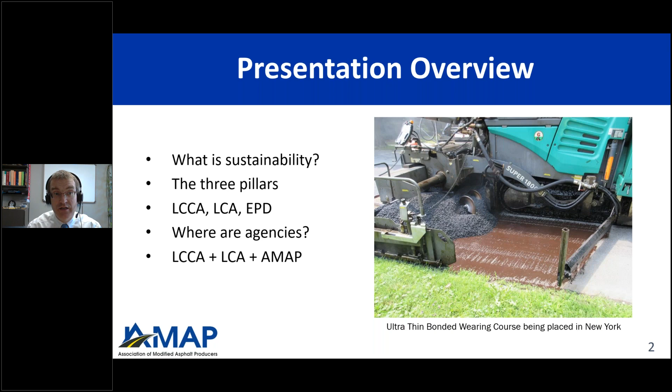So to start with, what is sustainability? I am fully cognizant that this has flirted with buzzword status. Resiliency has kind of replaced it, climate change has kind of replaced it, but I am familiar with that. That being said, I do think it's a very important term, worth thinking about and reflecting on whenever we move forward in our research and project areas.

When I think of sustainability, I really think of it having its roots in the United Nations. There are several documents, all available online free of charge, that started talking about these concepts of sustainability and how they've developed over the years. For example, in 1980, the UN put out the World Conservation Strategy, which really focused on just the environment. I think one that many people are familiar with, or at least familiar with the name, is the Brundtland Commission report, put out in 1987.

A key quote from this report is: meets the needs of the present without compromising the ability of future generations to meet their own needs. So this takes a bit of a step back and doesn't just focus on the environment, but talks about everything from a more holistic standpoint.

Then in 2002, during the World Summit on Sustainable Development, the UN introduced this concept of the 3 pillars. It's my understanding that this is where this concept of the 3 pillars first came about, defining sustainability in terms of economic, environmental, and social considerations. That's what we're going to talk about over the next couple of slides - what it means when we say economic, environmental, and social considerations.

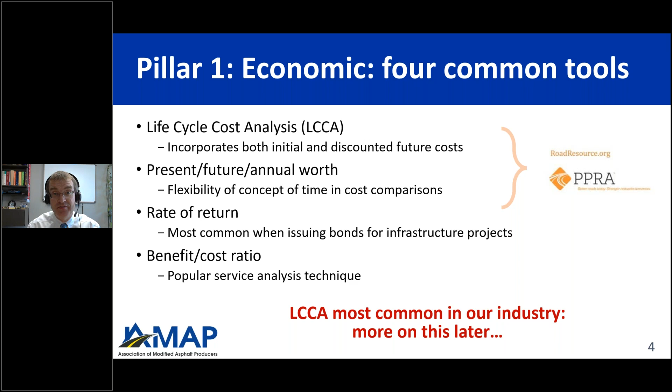Now, as I mentioned, the life cycle cost analysis, or LCCA, is by far the most common tool in the pavement industry, and I will talk a little bit more about this later. In the meantime, let's pivot over to the second pillar, which is the environmental pillar.

And again, I found 4 common tools that can be used for the environmental pillar. The first is the LCA, the life cycle assessment. And this has a lot of the same flavors as a life cycle cost analysis, but instead of looking at dollars, you're looking at emissions, energy use, wastes, and those type of environmentally related concepts.

And I could spend literally hours talking about a life cycle assessment. And if any of you know Dr. John Harvey at UC Davis, he could probably spend days talking about this. This is a core area of his research, but I'm just going to try and summarize it real quickly here.

The point of an LCA is to compile and quantify inputs of 4 stages: your product and materials, the construction stage, the use stage, and the end of life stage. So what we're trying to do is figure out what sort of energy goes into this, what sort of fuel use goes into these stages, and then what kind of emissions, what kind of wastes come out of them. You do that across the 4 stages, and when you compile and quantify these inputs and outputs, you can also hear these referred to as environmental flows.

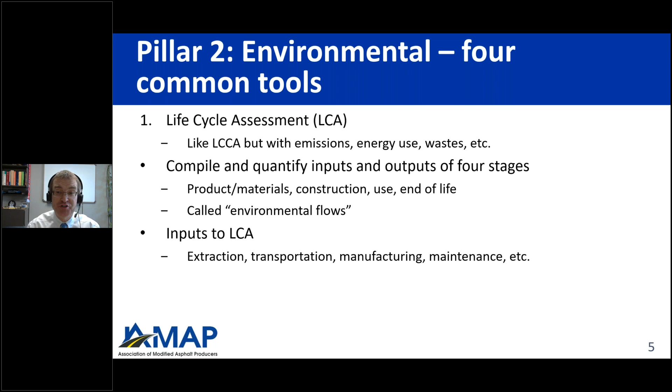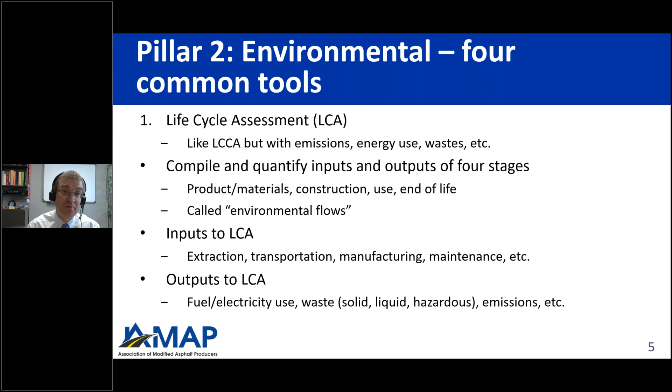So what are some of these inputs and outputs? Inputs to a life cycle assessment are extraction, transportation, manufacturing, and maintenance. And then outputs are fuel and or electricity use, any sort of waste that are generated. You'll often see these divided into solid waste, liquid waste, or hazardous waste, and any sort of emissions as well.

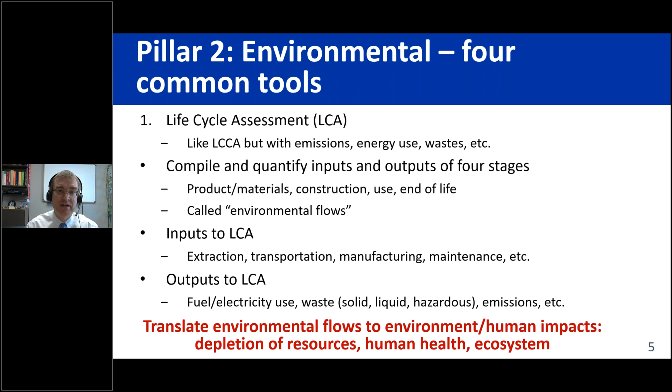And what you do is then you take these environmental flows, which are the inputs and the outputs, and those alone sometimes aren't terribly helpful. They give you some numbers, you may be able to compare them, but we want to translate those flows to environment and human impacts. So it's one thing to quantify the fuel use, the waste, the emissions, but it's another thing to talk about how that actually impacts the environment and how it impacts humans. Some examples are depletion of resources, human health, depletion of the ecosystem, these type of things. So there's a lot of details that go on in the background, but this is a nice broad overview of a life cycle assessment.

Now, there are a couple other tools out there, and you can Google all these terms or use whichever search engine you'd like to find out more about them. But the first is the ecological footprint. Basically what we do here is look at consumptions, and then we also look at what sort of land use you need, and you make a matrix. So this is how much we'll consume, these are the land resources we'll need to use, and you talk about concepts like food, energy, air, water, fiber, clothing, shelter, those type of things. So it's just a different way of looking at how much we're using and how many resources we actually have available to use.

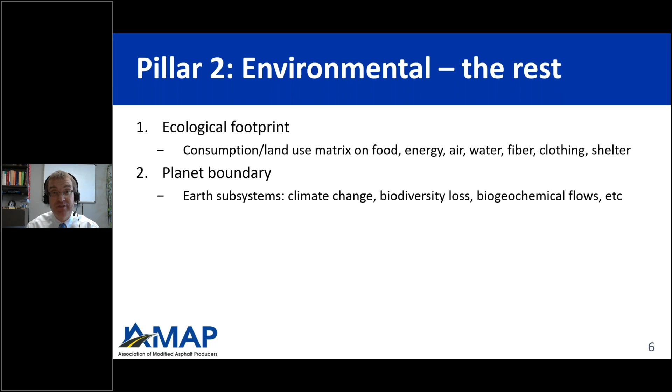So it's a pretty interesting system. Planetary Boundary is another popular environmental tool, and this is where the Earth was divided into different subsystems. Some examples are climate change, biodiversity loss, biogeochemical flows, those type of things. Basically they have tried to rate it, saying what is an acceptable level of these, and are we below or over them? If we are over them, how far over are we? So it's just trying to quantify those concepts.

Now, EPDs are the fourth tool that can be used in the environmental pillar, and this is actually directly related to the LCA, as we'll see in a minute. Environmental product declarations are very important, and if you work for a company, this is probably something very much on your radar. When I think of an environmental product declaration, I think of this as a safety data sheet. Those used to be material safety data sheets that you have to send with any material you ship in the mail, whether it be a chemical, asphalt binder, or a polymer. But it's kind of for the environment instead of for human safety - what kind of impact do these materials have on the environment?

Now, a key part of EPDs that you should always be in tune with is what the EPD is capturing in the product's life cycle. Some common examples are cradle to gate, cradle to grave, and cradle to cradle. Cradle is just what it sounds like - taking raw materials out of the earth. The gate is when it leaves a production facility. The grave is the end of life of that product. But cradle to cradle is how we can then use the material left at the end of life and put it into new products.

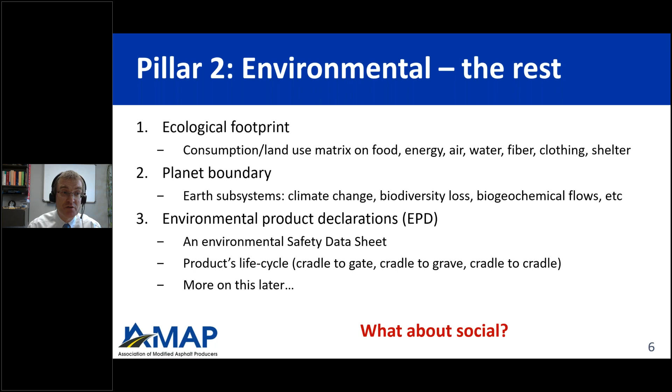And again, I'm going to turn back to the UN. There's a bunch of different ways we can look at this, but we're going to start with the UN and continue on with the UN's progress over the years. Before I start diving into the UN and some other tools out there, I do fully acknowledge that the social pillar is more difficult to quantify. It's a little harder to assign numerical values. It's obviously very straightforward to assign a dollar value or amount of carbon dioxide emitted, so the environmental and economic pillars are relatively straightforward, but the social pillar is a little more qualitative-centered.

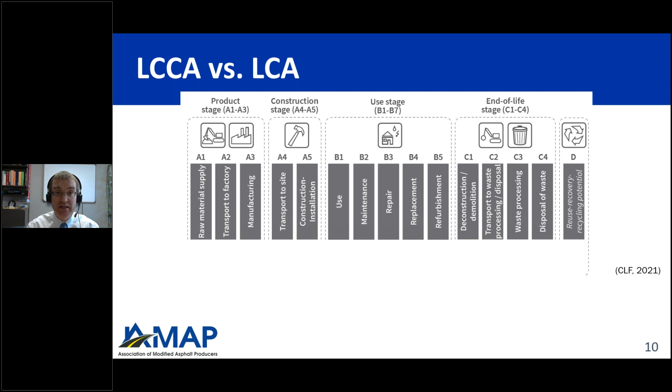Now, I also mentioned the terms cradle to gate, cradle to grave, and cradle to cradle. If you look at the A stage, the product and construction, cradle to gate is just the product stage, so A1 through A3, and then it leaves the gate of the manufacturing facility. That's cradle to gate. Cradle to grave is A, B, and C. And then cradle to cradle is A, B, C, and D. So you can look at those three different terms over these stages that are shown here.

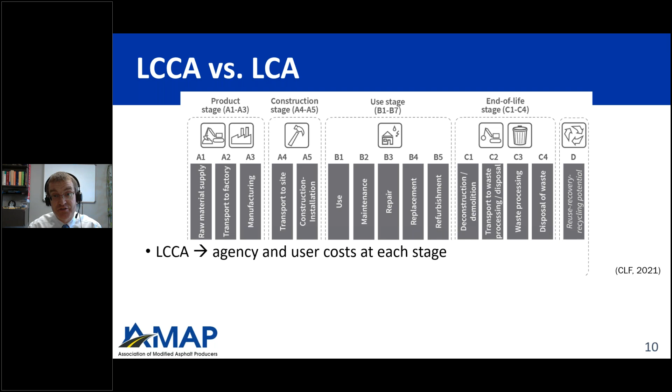So how does this relate to LCCAs and LCAs? Well, life cycle cost analysis looks at both agency and user costs at each one of these stages. So how much does the agency spend to get the material, construct it, use it, and then dispose of it? And what are the user costs associated with that? This really comes into play on the use stage and the end of life stage, because that's when users are most frequently interacting with the material.

And then we have the LCAs. What they do is translate any outputs of these stages. So during production, you obviously use either fuel or electricity. During production and construction, you generate wastes - solid waste, liquid waste, hazardous waste. During all these stages, there are emissions, and these can be from contractors, manufacturers, or users. What we need to do is take all of those outputs and translate them to actual impacts - how many resources do we deplete, what effect does this have on human health, all of these types of things. And as I mentioned before, if you perform an LCA, you can then do a PCR, and that leads to an EPD. So let's dig a little deeper into LCCAs and EPDs specifically.

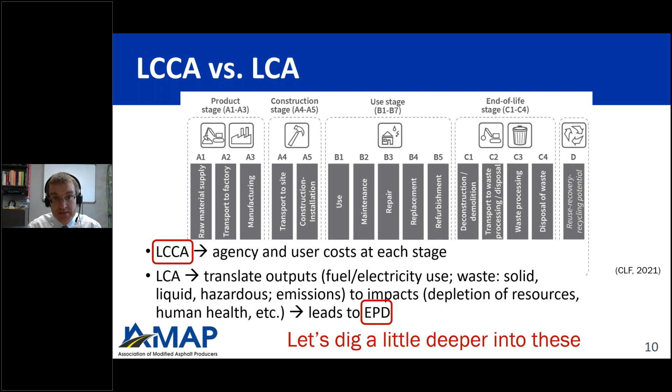So there are 8 steps to an LCCA. First, you need to develop your maintenance and rehabilitation strategy for some analysis period. So if you design a pavement for 20 or 30 years, when are you going to maintain it? When are you going to rehabilitate it? What sort of timing will we have for each of these strategies?

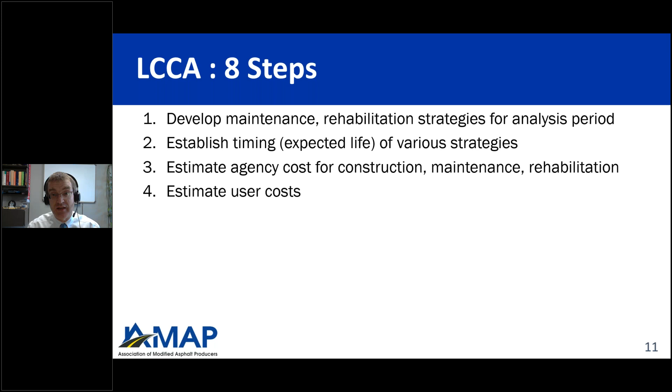You want to try and estimate both the agency costs for all of this and the user costs. Once you've developed the timing and the actual strategies you're going to use over the life of the pavement, you then try to estimate the cost to the agency for construction and any maintenance and rehabilitation. It's very tricky, but you also want to try to do this for users as well.

Then you show some of these things graphically using what's called an expenditure stream. You take all of these costs—not only the initial construction cost, but any maintenance, rehabilitation, and end-of-life costs—and bring those back to present costs. That's called the net present value. It gives you a dollar amount that reflects both today's cost of construction and future anticipated costs with maintenance and rehabilitation.

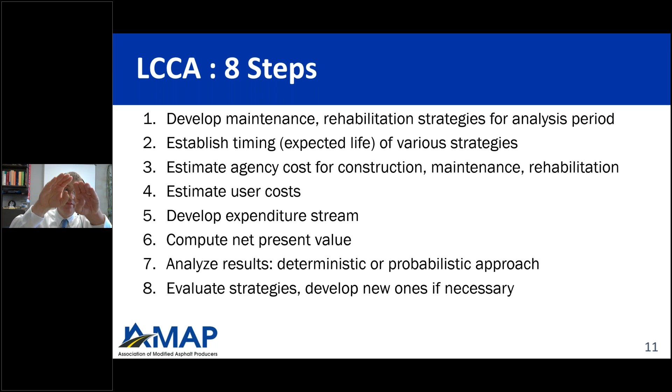You then analyze your results. I could go on a rabbit trail here about deterministic versus probabilistic analysis. In simple terms, deterministic assumes there's one solution. Probabilistic recognizes that there's variability in pretty much any assumption we make, so you get a probability distribution of your net present value. You have some mean value in the middle, which is generally the deterministic value, but there's a probability distribution associated with that, so you can try to estimate where it'll be within a range.

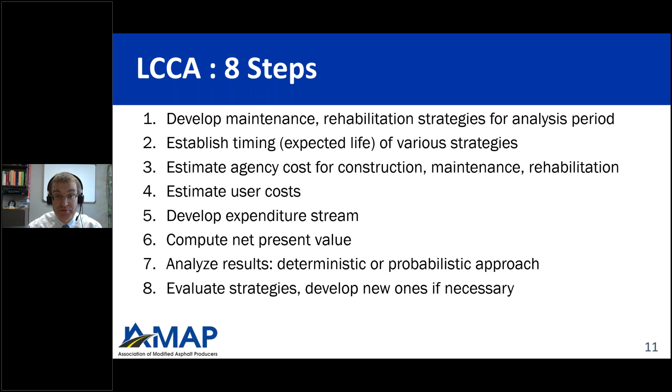You can evaluate different strategies. Hopefully you looked at a couple different maintenance and rehabilitation strategies, maybe different building materials, and you evaluate them, compare them, and if necessary go back to step one and start the process over. This can also be shown visually.

Let's take a look at my favorite example, comparing a chip seal to a 2-inch overlay. On the y-axis we have pavement condition, and a very common pavement condition index is A, B, C, D. A is a perfect road, and as you get down to C and D it gets worse and worse. Here I just defined D as the terminal serviceability of the road—that's arbitrary, there's no scale, just for demonstration purposes. On the x-axis we have pavement life, which here goes from 0 to 50, but you can analyze it however you'd like.

We have two different alternatives: a chip seal treatment or a 2-inch overlay treatment. We need to assume when we're going to place the chip seal and when we're going to place the 2-inch overlay. Here we assume we'll wait till your PCI gets to level C, then we'll apply a chip seal. When it gets down to D, we're going to do a 2-inch overlay.

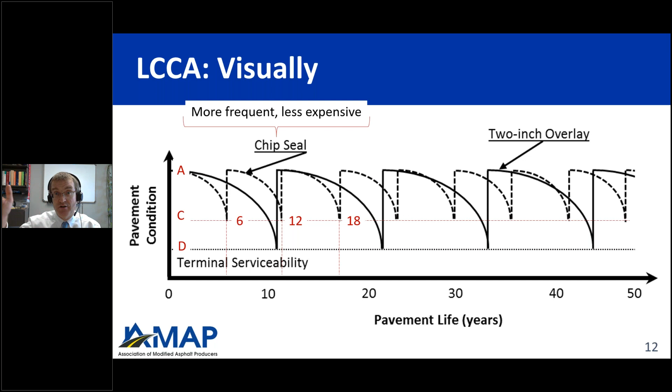You can see here that the chip seals are more frequent—they happen more often—but they're less expensive. I defined the chip seals as being placed at 6, 12, and 18 years, so in 6-year increments. The 2-inch overlay is less frequent but more expensive, and I define it as 11, 22 years, and so on.

If you go to roadresource.org, you can actually do this experiment. You can go into one of their tools, the life cycle cost calculator, and do a chip seal at year 6, 12, 18 for any length of network you want, and compare that directly to a 2-inch overlay. You need to put a price in, the life expectancy of those treatments, but you can play around with those numbers based on your local conditions and get a life cycle cost analysis.

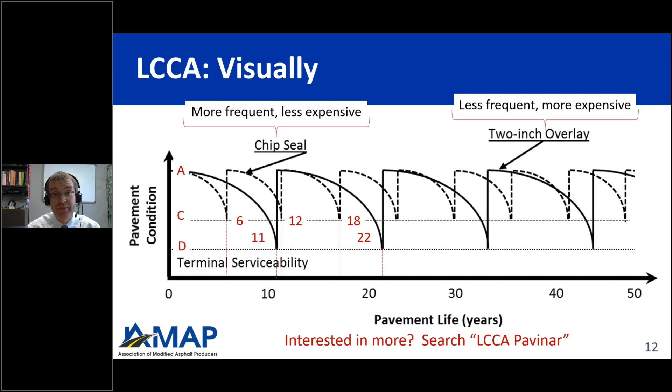Now let's take a look at EPDs. This is the second area that we're going to focus on.

As I mentioned before, EPDs are the end of a 3-step process. In order to generate an acceptable EPD, you first need to do a life cycle assessment, which includes the inputs and outputs of production, construction, use, and end of life. This includes any transportation of materials or wastes at each of those stages, as well as emissions, waste, and energy use, which we translate into human and environmental impacts.

Next, you need to execute what's called a product category rule, or PCR. This is a set of rules, requirements, and guidelines for developing EPDs. These are very important because you can't generate an EPD out of thin air. You need to first perform a life cycle assessment, and then follow the PCR, which includes definitions, descriptions, goals, stages, environmental flows, impact, and all these type of things.

This ensures that you are building a solid foundation in order to generate the EPD. So if you perform the proper life cycle assessment and the product category rule, you have confidence that you will generate an EPD that will be accepted.

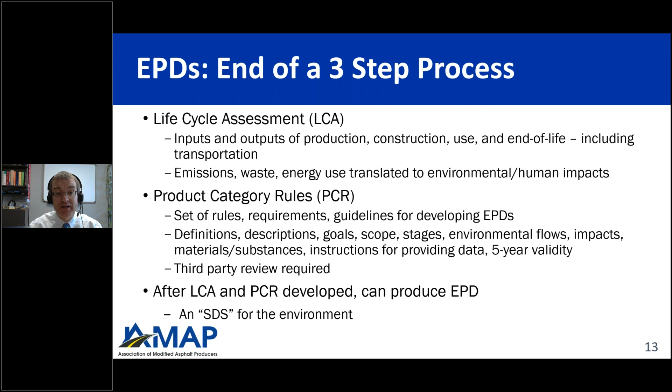After the LCA and the PCR are developed, you can produce an EPD. As I mentioned, I see these as a safety data sheet for the environment.

Now I'm going to go over an example of an EPD, publicly available from NAPA, the National Asphalt Pavement Association. If you go to NAPA's website, they have done an extremely large amount of work on LCAs, PCRs, and EPDs. One requirement of developing these is that the LCA and the PCR need to be publicly available. So on NAPA's website, they have their LCA and PCR posted, along with a lot of the background documents that generated those two tools.

Now, NAPA also has a tool where, if you're a member company, you can generate a site-specific EPD. What this means is if you are producing hot mix asphalt or warm mix asphalt at a plant, you may need to generate a specific EPD for that plant for the asphalt concrete mix you are producing.

NAPA members have a choice: they can post their EPDs online so anyone can look at them, or they can generate an EPD and keep it to themselves. So if you dig around on NAPA's website, there are a bunch of publicly available examples of EPDs, and I encourage you to take a look at those if you have not already.

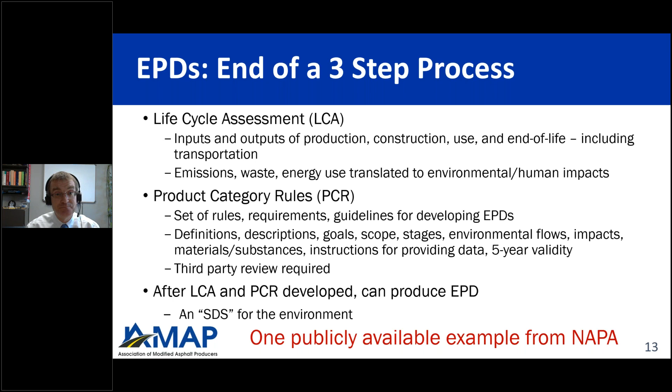Now, EPDs are typically 10, 12, 15 pages, something like that. There's a lot of good information in there, but in my mind, the meat, the heart of the EPD is this summary table.

You can see the summary table looks at specific parameters. The parameters that this EPD lists are global warming air, ozone depletion, acidification, eutrophication, smog air, and abiotic depletion of fossil resources. These are the parameters they are measuring for the impact to the environment from making asphalt mixtures, and you can see the units there.

And then we have our 3 different stages. You'll note that this is a cradle-to-gate EPD because we're looking at A1, which is materials, A2, which is transport, and A3, which is the production itself.

If you guys have ever been to an asphalt plant, the aggregate comes in, so it's measuring all of the emissions and wastes associated with getting the aggregate out of the ground and bringing it to the plant. This includes the transportation associated with bringing that raw material to the plant, also the asphalt binder and any additives you may be adding, and then the production of the mix itself.

So this is what we're looking at with NAPA. Now, in my mind, the numbers themselves standing alone are relatively meaningless. I can't sit here and tell you what 9.89 times 10 to the negative 11th kilograms of CFC11 equivalent will do for your ozone depletion air. That was A2 ozone depletion air. I really have no frame of reference for that, but you can compare this table to other tables of other materials to see what sort of differences and similarities there are.

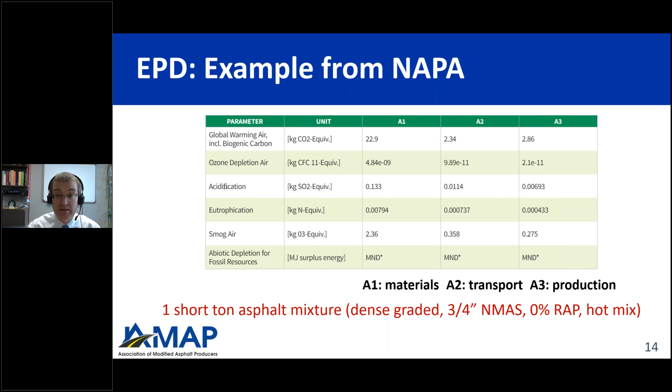So that's my background. We talked about sustainability, we talked about the 3 pillars. I honed in a bit on what agencies are doing, at least my interpretation of what agencies are doing when it comes to sustainability in the 3 pillars. And I identified LCCAs, LCAs, and EPDs as kind of their focus areas.

So this is an AMAP webinar, so what does this have to do with AMAP? To tell you the truth, when I was putting this presentation together, I did not know how AMAP defined a modifier. So I went to their website and they defined what a modifier is. Their definition of a modifier is something that is added to asphalt to improve the performance grade through chemical or physical alterations. In the extended definition, they talked about some general categories: polymers, acid, light oils, GTR, which is ground tire rubber, and recycled products.

But if you dig a little deeper into AMAP's website, they actually have a huge laundry list of all the different materials they consider modifiers. And these are those materials. Don't worry, I'm not going to read this—I don't think I could pronounce everything correctly, but you can see there's a whole slew of different types of modifiers out there. I think it's of high interest to understand how these modifiers impact the 3 pillars—how they impact LCCA, LCAs, and EPDs, and what are the pros and cons of potentially using these.

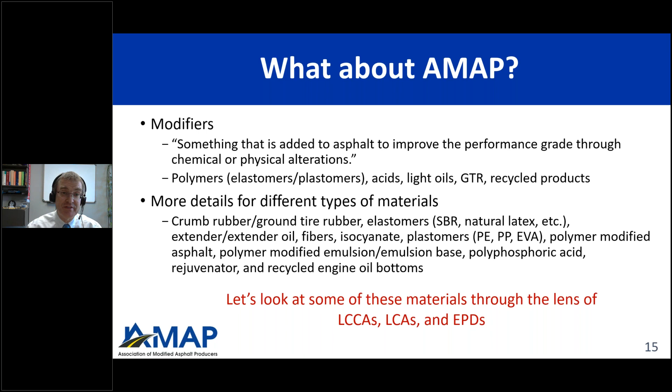So let's look at a couple of examples. Let's start with crumb rubber or ground tire rubber. When you look at GTR and look at the initial cost, it's generally more expensive than neat asphalt binder, but generally less expensive than polymer modified asphalt binder. So right away, if you just look at the initial cost and not the life of the product, you may not be getting all of the information.

Because if you start to look at the life of the product, the research project by Buttlar and Rath, produced in 2021—I'll provide the title in upcoming slides—found that you can make a thin overlay with rubber that can be 43% cheaper over the life of the pavement and have a 10% better lifespan versus unmodified. So yes, it may cost a little more initially, but you're getting long-term savings and life extension off of that.

And they also found that if you try and get the same performance, you can actually get a 50% reduction in thickness. So that will actually reduce the initial cost because of the advanced performance.

So there's a couple things here that I want to unpack and focus on. One, looking at the initial cost can sometimes shortchange you, but two, there are different ways that you can look at the life of the product. You can change the costs associated with maintaining it, look at the life extension you could potentially get, or look at changing the structural design in order to get the same lifespan. So there are a couple different levers that you can pull in order to examine two products next to each other.

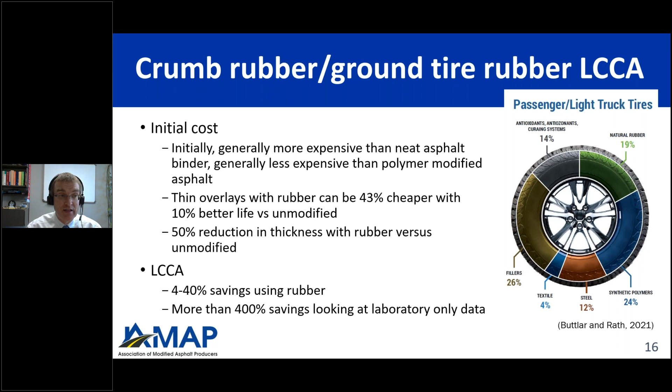And when you look at overall takeaways from this research project, there's less tire wear when you use GTR. You have a reduction in rolling resistance, which means you have less fuel consumption. That goes back to agency versus user costs.

They also looked at the life cycle assessment. Now, I mentioned cradle to gate, cradle to cradle, cradle to grave, those three different ways of looking at the life cycle. The LCA that they performed only looked at the production process, so extracting the materials from the ground, trucking them to the job or to the production facility, then manufacturing it, and that's where it stopped. But they did believe that this is where rubber had the higher impact. And they found that when you include the use stage, they anticipated that it will have even an additional lower impact than what they saw at the production process.

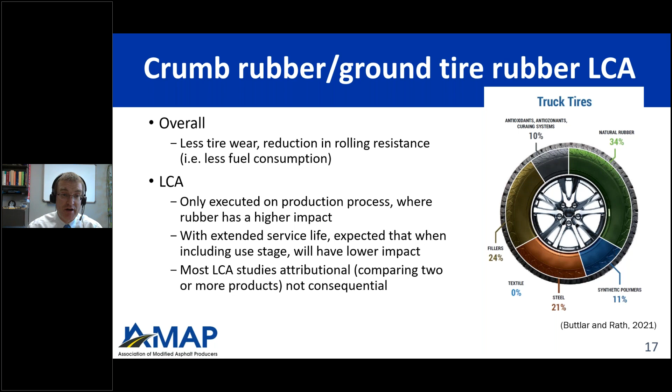Now, they also made an interesting statement that a lot of LCA studies are what are called attributional, which is just comparing two or more products, and not consequential. And in my mind, this is actually an area that we need to do better in, because there are quite a few LCAs out there that compare product A to B, but we need to do a better job of laying a solid foundation so we can just talk about one product and this is what it does, not necessarily just saying one product versus another product. So I found that to be an interesting takeaway.

Now, this is one of the things that I encourage you if you want to learn a little more about this. Bill Buttlar, he was actually my advisor at the University of Illinois. He always does fantastic work. He's now at the University of Missouri. But if you search State of Knowledge Report on Rubber Modified Asphalt, if you just Google that term, you'll be able to find it. So you might want to take a screenshot now or just jot that down. But this is put out in 2021 by Buttlar and Rath.

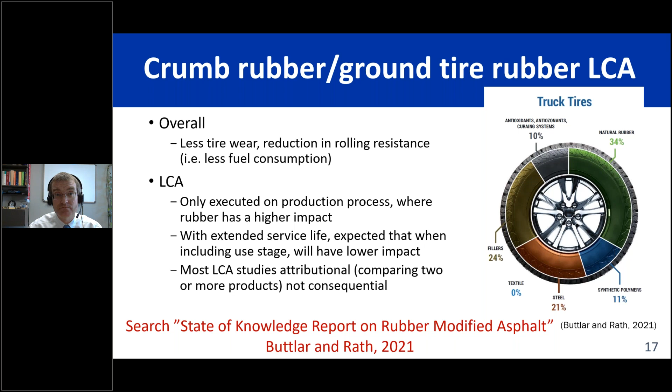Now, pivoting away from GTR and looking at polymer modified asphalt binder, there have been a lot of LCCAs on polymer modified asphalt binder. The one we're going to look at is an unmodified full structure versus a polymer modified surface versus a polymer modified surface and base, which is called a perpetual pavement in this study. This is very important because we're looking at not only changing materials, but also potentially changing design. So when we think about pavement structures and modifiers in asphalt pavement, definitely spend time playing around with what it does in the design process. You're not only changing the materials, but you could potentially be changing the design, and you can really leverage that, especially in a life cycle cost analysis.

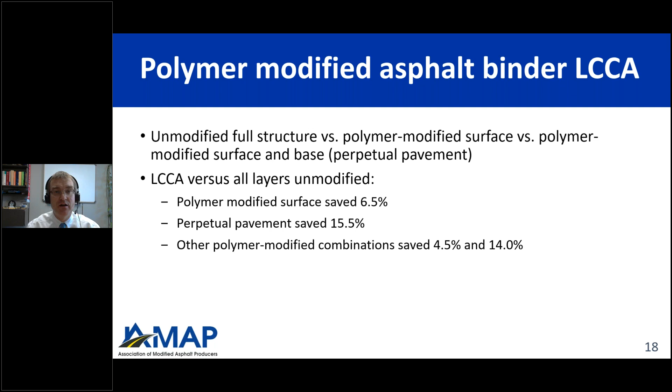And so what they did is they looked at an LCCA versus all layers being unmodified. And they found when you just put a polymer modified surface, you save 6.5%. But then when you do that perpetual pavement, which is a polymer modified surface and base, your LCCA actually saves 15.5% versus an unmodified structure. And then they also did different combinations. This is a very nice report. I'm not going to get into all the details, but they also looked at other polymer modified combinations, and they kind of bounced around between that 5 to 15% of savings, depending on what structure, what part of the structure you modified and what type of modification you actually did.

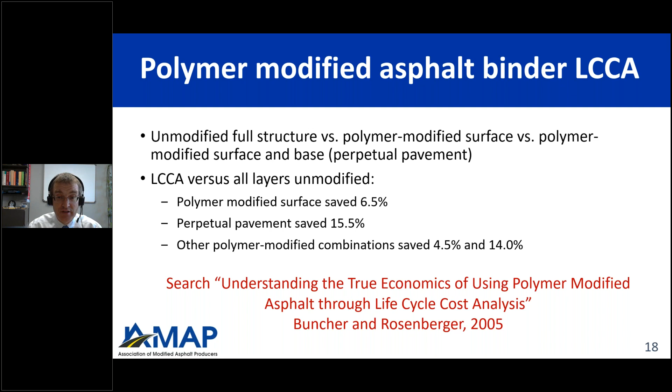This was put out by Buncher and Rosenberger in 2005. If you search 'Understanding the True Economics of Using Polymer Modified Asphalt through Life Cycle Cost Analysis,' this should pop up as a PDF, one of the top results. I encourage you, if some things here piqued your interest, to leverage this report to get more details.

Now, the next life cycle assessment I'm going to look at is just for the asphalt binder, and we're going to turn to the Asphalt Institute. They performed a life cycle assessment looking at neat asphalt binder, SBS modified asphalt binder, rubber modified asphalt binder, and polyphosphoric acid (PPA) modified asphalt binder. They just looked at the terminal: extracting the material from the ground, transporting it to an asphalt binder facility, modifying it there, putting it on a truck, and that's when they stopped this LCA analysis.

However, I encourage you to remember this is just looking at the terminal - this is just cradle to gate. We're not looking at the lifespan of the pavement. If you combine this with that previous study on SBS modified pavements, they actually saw extensions of life and reduced costs over the life cycle cost analysis. I'd hazard a guess that if you're seeing reduced costs, there's a good chance you'll also see reduced emissions over the life of a pavement. This is just a snapshot at the beginning, but I think it shows the potential of how we could move forward.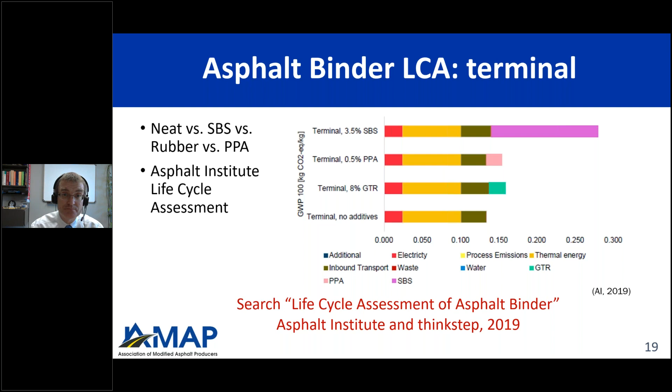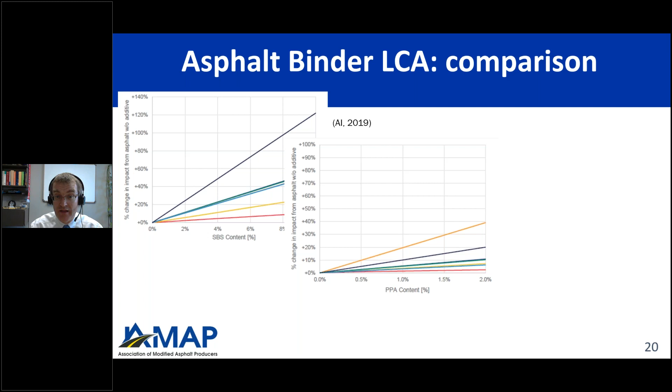So that's for SBS modified, but if we look at PPA, SBS goes anywhere from 10 to 120% increase, PPA only goes from about 3 to 40%, and GTR only goes from about 5 to 20%. Those color lines I told you to disregard before are just different sorts of emissions they looked at: global warming potential over 100 years, global warming potential over 20 years, primary energy demand, acidification, eutrophication, smog, and water consumption. These are the different emissions, waste, or environmental impacts the Asphalt Institute looked at for these three modifiers, examined at different levels to get an idea of how changing the level impacts the LCA.

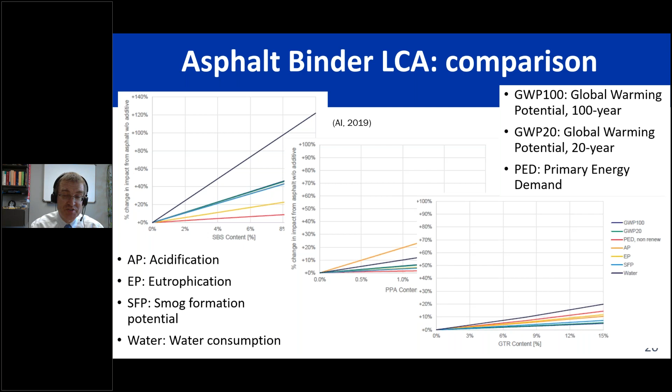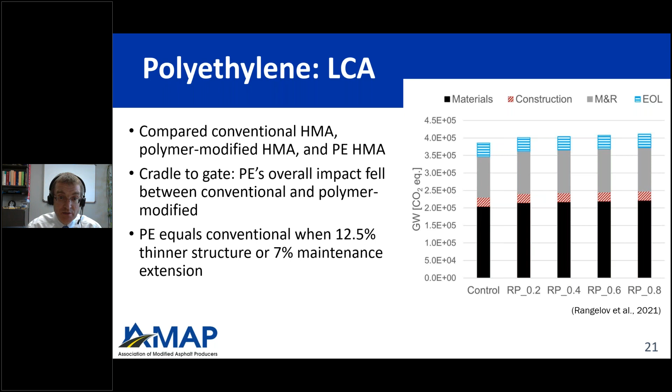The polyethylene's overall impact fell somewhere between a conventional and a polymer modified impact. They looked at different ways you can extrapolate this out over the life of the pavement, and you can do that a couple different ways. You can either thin the structure, and they found you can thin it by up to 12.5% by using polyethylene, or you can extend your life before the next maintenance is required by 7%. So again, lots of levers that you can pull, lots of different ways that you can look at these different materials and how to quantify them.

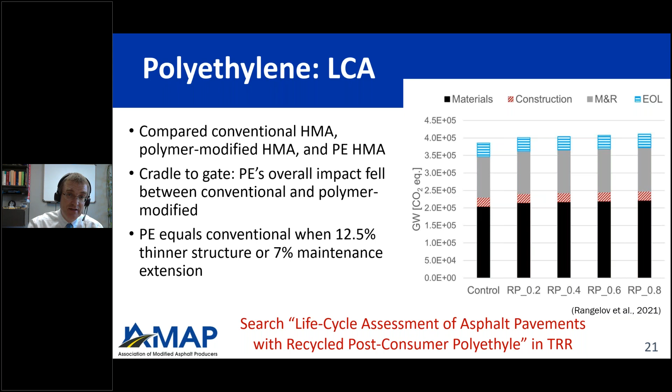Now, I do apologize, this is a transportation research record, it's been published. However, if you search life cycle assessment of asphalt pavements with recycled post-consumer polyethylene, there is a preprint of this available, so you can read all of their findings. There are watermarks over all the findings. If you have access to TRR you can get the clean version, but there is a preprint out there which is essentially the same content, and you can find that by searching this phrase here below.

Now, asphalt emulsions, I could talk all day about asphalt emulsions, but we're going to start with the life cycle cost analysis. And again, there's been several studies, dozens of treatments looked at, University of Nevada Reno, Iowa State, Rowan, Texas State, Georgia Tech, NCAT, and the University of Arkansas. We've all done LCCA analysis in this.

Now, if you go ahead and read all of these papers, which I'd be very happy to talk about at a conference, perhaps over an evening discussion, all of these studies have very similar conclusions, whether they're theoretical or they're using field data. Time and time again, if you have proper preservation, proper maintenance, it is cheaper than rehabilitation and reconstruction over the life of a pavement. Simpler treatments, meaning just asphalt or asphalt emulsion, no aggregates, tend to have a lower life cost than the more complicated ones. When you add aggregate, when you move into the hot mix treatments, that increases the cost. But a really big takeaway too is blending these treatments can really optimize a system.

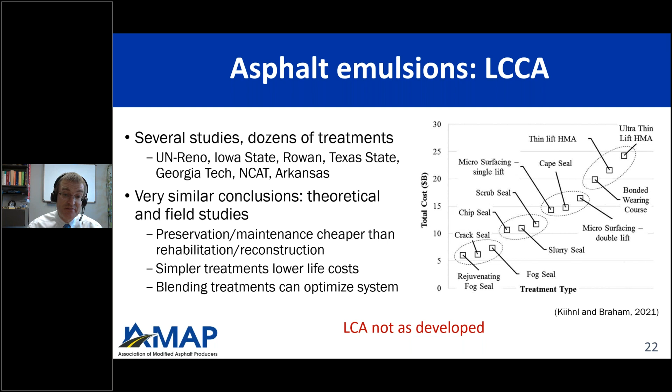Now, the life cycle cost analysis of asphalt emulsions is quite defined and developed. The life cycle assessment is not quite as developed. And this is something that the Pavement Preservation and Recycling Alliance, or PPRA, is actually very interested in moving forward. We are looking long-term to develop EPDs, or environmental product declarations, for treatments, but first we're focusing just on asphalt emulsions. So we're developing a life cycle assessment, we're writing a product category rule, and then we're going to develop 8 environmental product declarations.

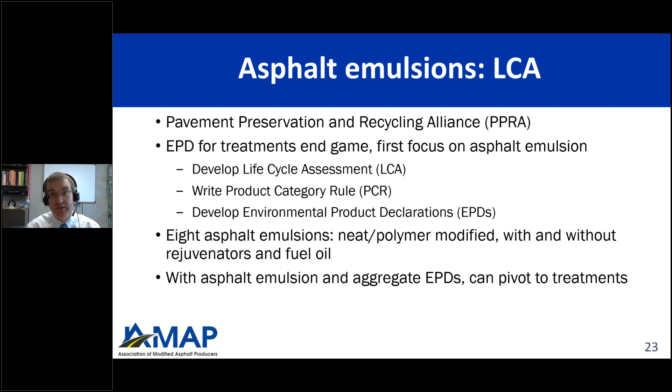And the 8 environmental product declarations are going to look at neat and polymer modified, with and without rejuvenators, and with and without fuel oil. So if you look at all the different combinations there, you have 8 different combinations toggling those from neat or polymer, with and without, those type of things. We have 8 different total asphalt emulsions that we're making EPDs for. And once we get those EPDs for the actual asphalt emulsion, hopefully we'll be able to then incorporate those with aggregate EPDs, and then we can start looking at treatments, not just the asphalt emulsion.

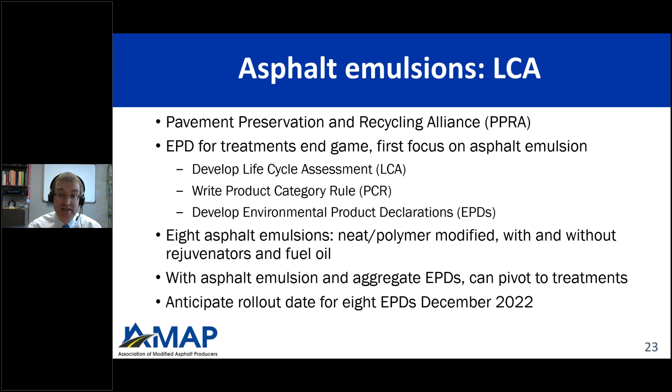And our anticipated rollout date for the 8 EPDs is December of 2022. So I encourage you to keep an eye on any sort of communication from PPRA, AEMA, ARRA, ISSA, or AMAP, because hopefully we'll be able to have some conversations about those 8 EPDs first thing next year.

Now, finally, the last example I'm going to look at, I know this is a 1-hour webinar, I know we're at 52 minutes. I appreciate everyone's patience for hanging in there. And I do see that there's a couple of questions, and we'll get to those in just a second. But let's take a look at rejuvenators.

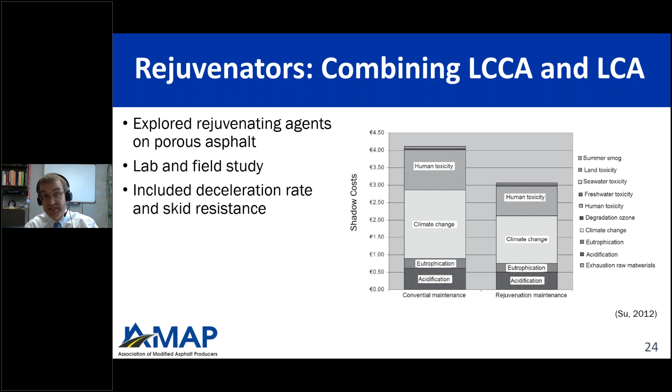And I really like this study. This is very interesting because they combined a life cycle cost analysis and LCA. What they did is they explored rejuvenating agents on porous asphalt. They did both a lab and a field study. The nice thing is that they actually looked at the performance in the field, so they looked at deceleration rate and skid resistance.

They combined all these different factors from both the lab and the field. But what was very interesting is they quantified the damage to society by the environmental inputs by developing what they say is a shadow cost. So when I've been talking about the environmental pillar, I've been talking about emissions, wastes, all those type of things. What they did is they took those environmental impacts and translated them to a dollar amount. So they took their LCA and translated that into an LCCA.

This is very nice because it allows you to just present dollar amounts. Now, this was a study done over in Europe, so the units are in euros, but they call this a shadow cost. And this is a very interesting concept. I had actually never seen this paper before. And this is one of the reasons I really like doing these webinars, is I always try and comb literature to see if there's things that I missed, to explore different areas.

But this concept of shadow cost is interesting because it changed the human toxicity, the climate change, the eutrophication, acidification. It changed all those environmental impacts into a dollar amount, or in this case, a euro amount.

So something that I thought was very interesting, and there are other studies out there. There are actually quite a few from industry. I tried to shy away from that just because sometimes some industry studies have relatively specific agendas, and I don't feel comfortable saying whether or not that's happening or not. So I tried to focus mostly on academic reports in this summary.